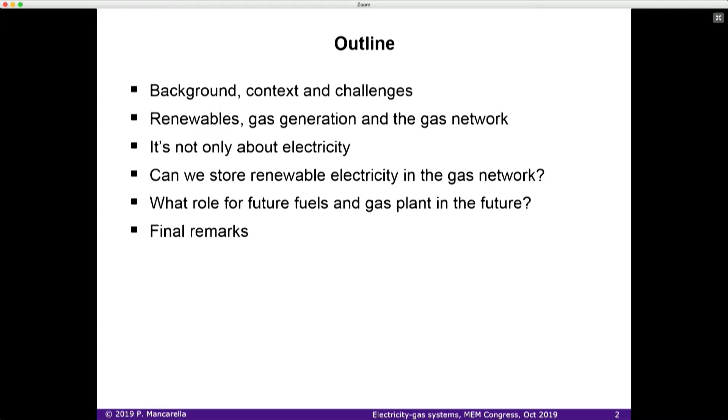The general context of this work is related to the so-called energy trilemma. So the requirements to deliver energy that is sustainable, so low carbon, in other words, is secure, and of course it's affordable, inexpensive. Of course, it's not easy to meet these three aspects of the trilemma altogether. That's why it's called a trilemma.

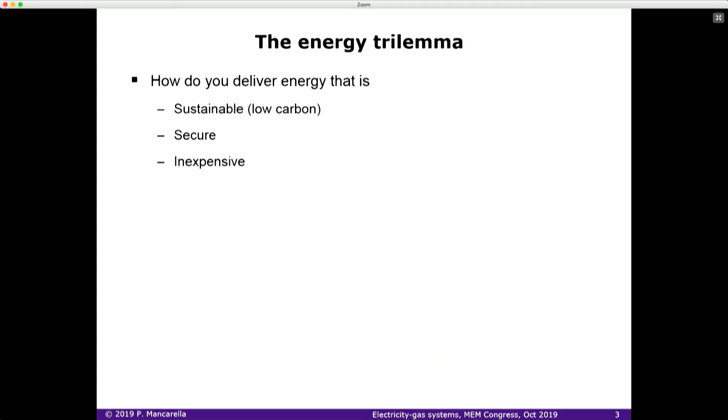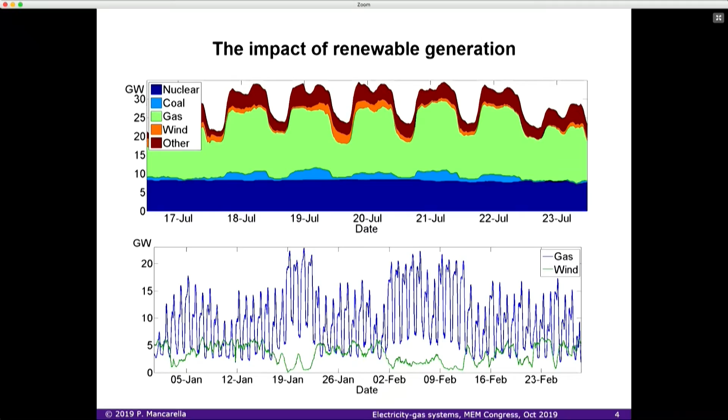Now, this is a situation that is common in many countries, where in practice, gas generation, particularly combined cycle gas turbines, and in some cases also open cycle gas turbines, are used to balance the variability and the uncertainty of wind and, where it's the case, also solar energy.

What are the challenges when we talk about that? Well, there are some challenges related to the technical aspects and the economic aspects of operating such an integrated system with renewables and conventional gas generators. In this slide, what I plotted is, for different penetration levels of wind capacity in the United Kingdom system, the level of displacement that wind brings onto conventional gas generators in terms of both capacity and energy.

To be more specific, if you look at the level where it says 30,000 megawatts wind, you can see the orange column indicating 23%. That means that 30 gigawatts of wind is effectively displacing 23% of energy produced by gas generators. You also see a smaller column, sort of reddish brown color, again for 30,000 megawatts of wind, indicating 6.4%. That refers to capacity displacement.

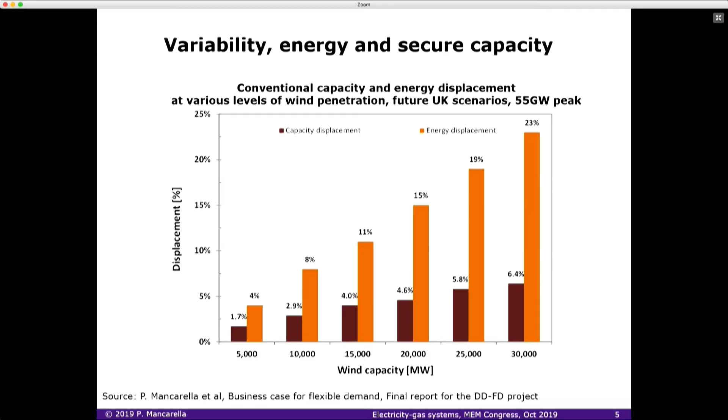And this effectively means that if wind is not there to cover the peak demand, because there may be no wind blowing when it's needed, you still need conventional gas generators to supply the peak demand. Therefore, a relatively small amount of capacity is displaced. However, any time that wind or solar energy is available, because the marginal generation cost of renewable energy is close to zero, it would displace energy that otherwise would be produced by conventional gas generators.

If you look at this more specifically in terms of utilization level of these generators, what I plot here is the utilization level for the entire generation fleet in the UK. It is not a real number, but it's realistic numbers. It's based on a model that is basically reflecting the real UK system. And you can appreciate the utilization level for different generation units that constitute the UK generation fleet.

As you can see, in brown we indicate the utilization level of conventional power plants when there is no wind and no renewables in the system. Whereas in orange, we see the utilization level in the presence of 30 gigawatts of wind, which is almost the current amount that we have in the system. Clearly, the utilization level of the generators goes down substantially. On average, it goes down from about 50% to less than 40%.

This is particularly severe for the so-called peakers. These are basically the last 50 generators in the UK fleet, which are also the smaller and more flexible generators used to cover the peaks and to balance the system. As you can see, their utilization level goes down dramatically, and for many of them moves from 30-20% to less than 10%. There are quite a number of generators affected, and these are primarily gas generators.

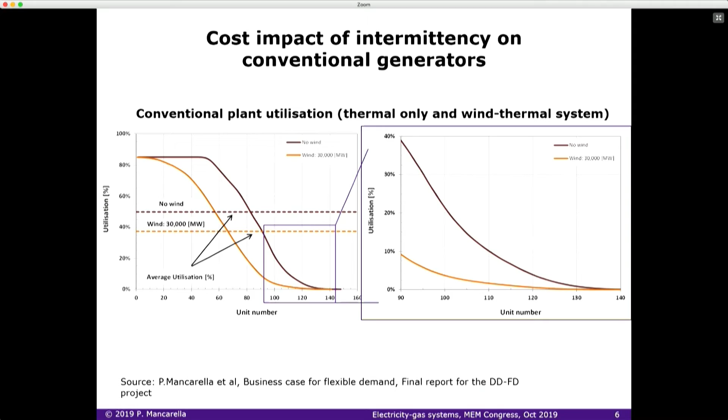Why is this important? If you plot the cost of production from a conventional generator, for example a gas generator, against its average utilization level, you see some form of hyperbolic function. Of course, you would like a very high capacity factor so that the average cost of production goes down, because it also incorporates investment cost. The higher the capacity factor, the lower your average cost, because you recover your investment cost over a large amount of energy. I'm sure many in the audience will be familiar with these concepts.

If you take the current average today, about 50% corresponds to a certain level of average cost of production for thermal generation plants. Imagine that this is primarily gas, because coal is not really part of the system now. If you introduce more and more renewables, because the utilization level goes down on average, the cost will go up a little bit.

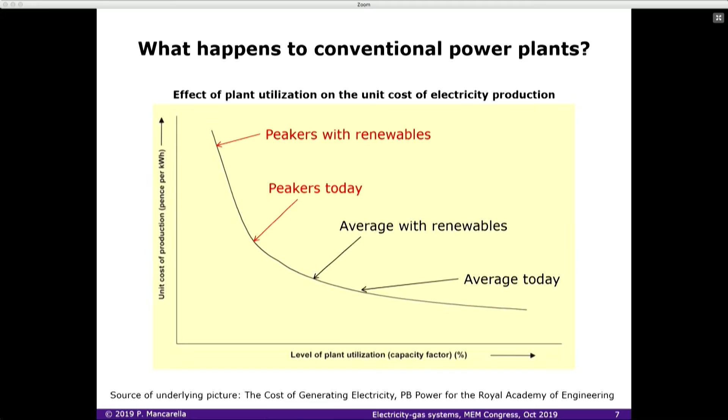But what does this mean for the system? If you look at the role of gas power plants today, they are the flexible generation units providing flexibility as well as security and reliability. What happens if these units go bankrupt and get pushed out of the system by renewables, which in many cases are there because they are supported by energy policy schemes rather than being fully competitive in the market? What happens is very intuitive, and unfortunately, it has already happened.

Conventional generators, gas generators were pushed out of the market by renewables. Therefore, the moment that there was an event, a problematic event, and you needed security support from conventional generators, it was not possible. And there was a system-wide blackout in South Australia.

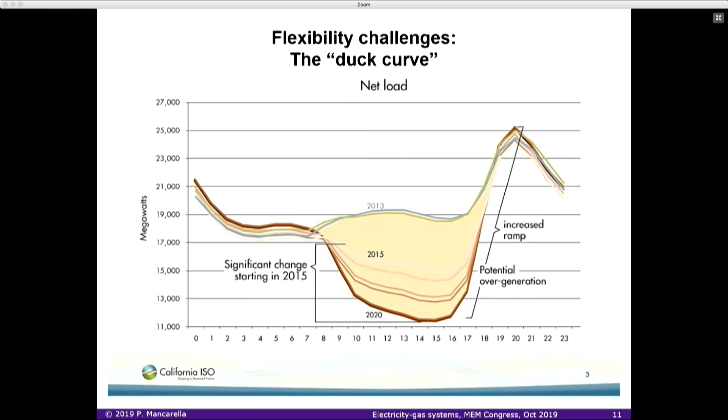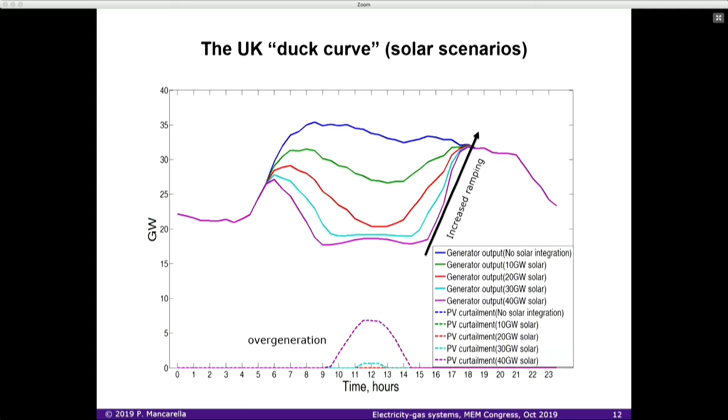Very similar issues, you would say, in UK models for the future, where effectively with more and more solar here in the UK, which is not a very sunny country, as you would know, there may be substantial ramping issues, and the behavior of the combined cycle gas turbines in future scenarios changes significantly, and also in very non-linear ways. For example, the utilization level first goes down and then goes up because of the requirements for reserves, if you use conventional generators, gas generators, to provide the reserve services. And these reserve services will be more and more needed in larger quantities in the future to deal with variability and uncertainty in wind and solar.

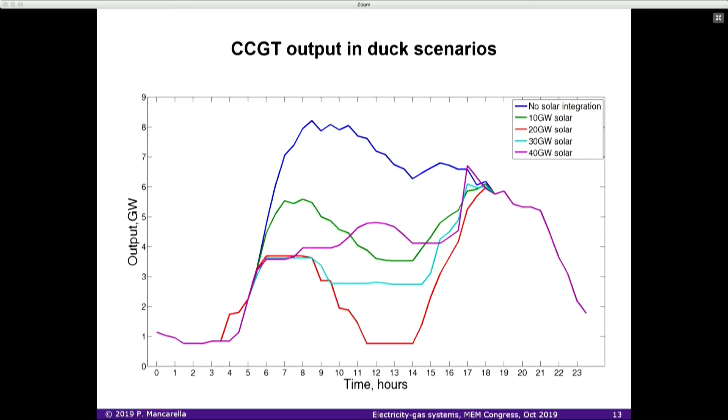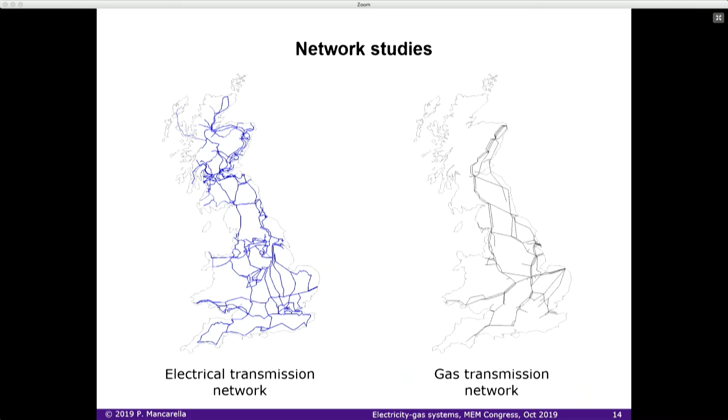And to address this a little bit better, actually, we started developing more consistently integrated system models for the UK national grid that look at integrated analysis of the electricity and gas transmission networks. So these are the real networks, and this is the model that we developed some time ago for the UK national grid, that was particularly worried about a number of issues that might come with flexibility.

As many of you would know, when you operate the gas system during the day, you would do this by using the line pack flexibility that is available in the gas pipelines, especially the amount of storage that is available in the gas pipelines that serves as a buffer for energy that is needed to be pushed into gas generators, for example, or to supply the heat demand, like in the case of the UK, where the heat demand is very substantial.

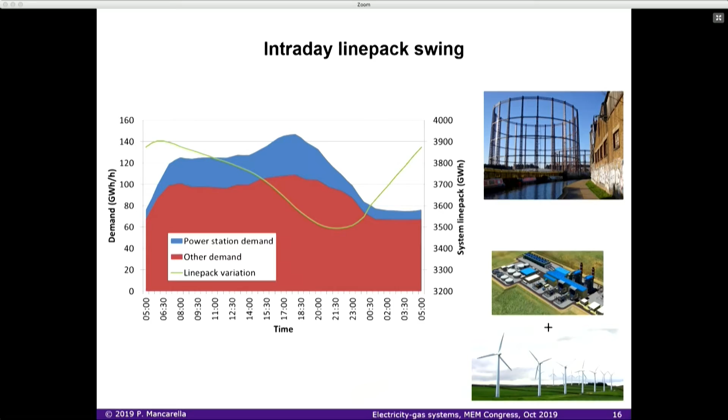And normally you would refill the line pack during the night, and then you would use this line pack. So you would use the storage available in the gas network during the day until reaching a minimum immediately after the peak, and then again you would start replenishing, filling up again this storage that you have available in the gas network.

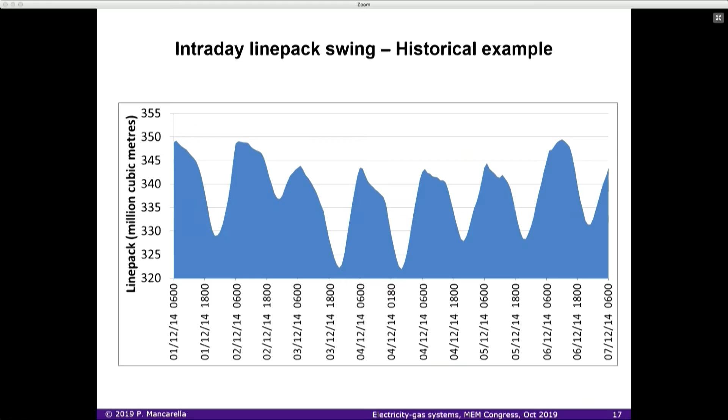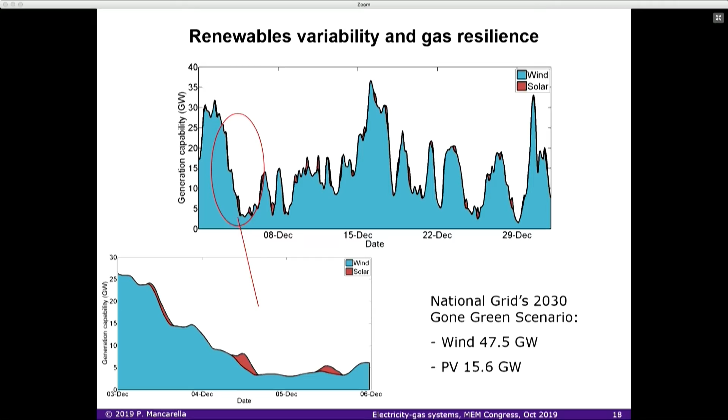Now, if I imagine this kind of situation in the future when there is lots of renewables, as I said, there would be lots of variability brought by these renewables. And again, we put ourselves in a future scenario with, in the UK system, lots of wind and lots of solar. As you can appreciate, you may have some days where over 1 or 2 days, wind can change from about 25 gigawatts to about 5 gigawatts. So we have a huge variation in wind output across 1 day or 2 days.

The problem is not only the fact that you have this huge variability, as you can better appreciate here. The problem is also your ability to predict this variability of wind, so the uncertainty of forecast in wind and similarly in solar, and therefore the ability of procuring resources that can balance the system.

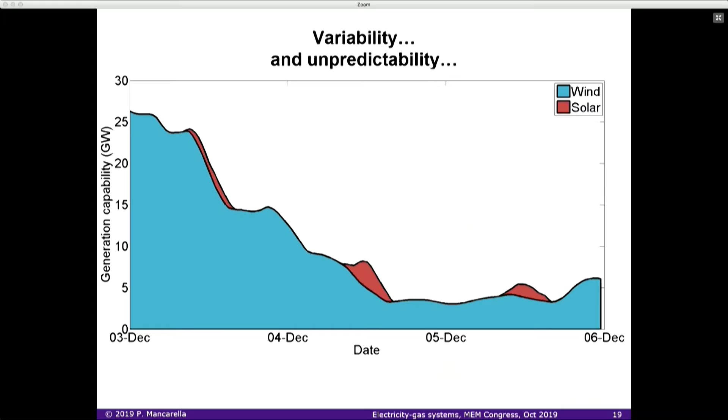And again, of course, I'm talking primarily about gas power plants, because effectively, when you manage the gas system, as again many of you would know much better than me, you would schedule your electricity system, of course, but also your gas system the day before. And then within the day, you would try to manage the unscheduled requirements for providing gas to the system by managing, of course, the line pack flexibility, first of all, but also in case using storage terminals, LNG terminals, and all that. But primarily, you would like to use the flexibility available in the gas network line pack.

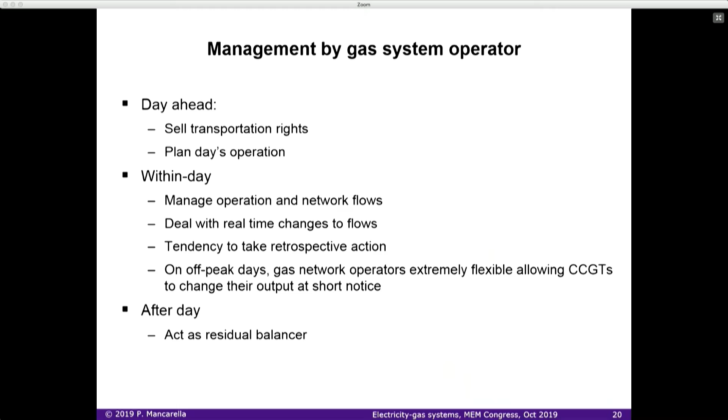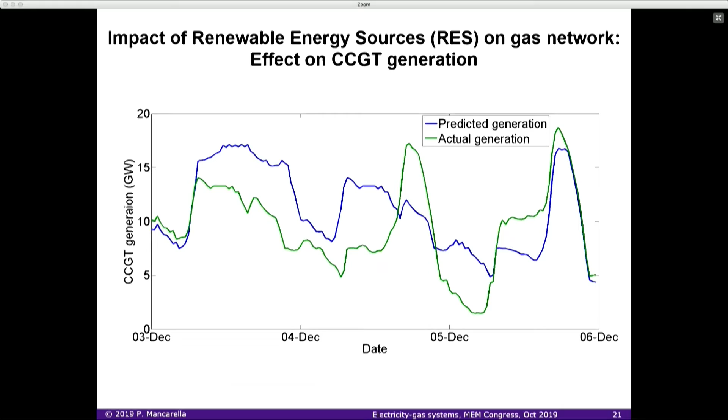When you have situations very extreme, lots of wind out, I said it's not just about the variability; it's also about the complexity in managing this variability, given the potential uncertainty of that. In this picture, I show what the predicted generation was for combined cycles under similar conditions I was showing earlier, in blue, and what the actual generation was in green. Obviously, the blue is coming from some form of day ahead generation schedule, whereas the green is coming from some form of real-time dispatch to balance the actual wind that was available at the time.

So the problem is, because I have all these renewable energy sources that are highly variable but also partly unpredictable, if I rely more and more on gas power plants to balance that massive amount of variability, I may actually have trouble with the physical management of the gas network and particularly of the line pack.

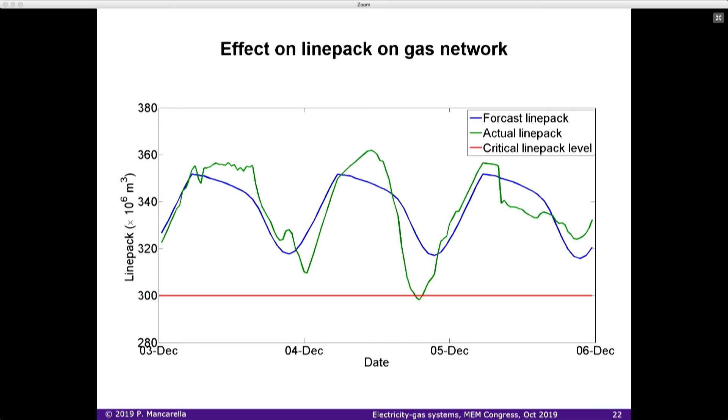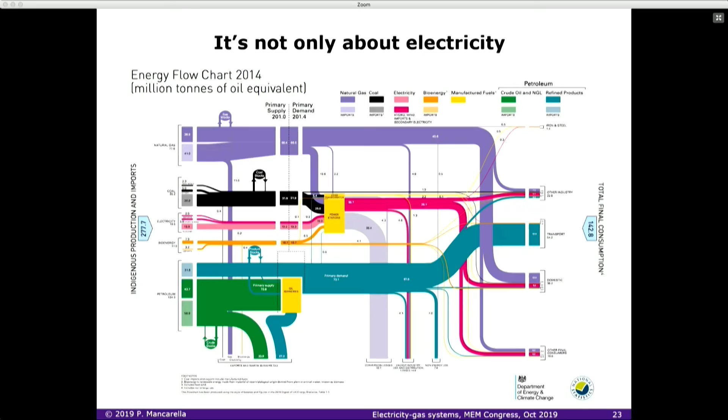However, the studies that we were carrying out for National Grid brought into the picture a further assessment, primarily the need for understanding how heat was interacting with electricity and, of course, gas, under future scenarios of electrification or use of other technologies. And this really goes into the question of how we optimally integrate all energy sectors and try to make use of renewables that in many cases could actually have to be curtailed.

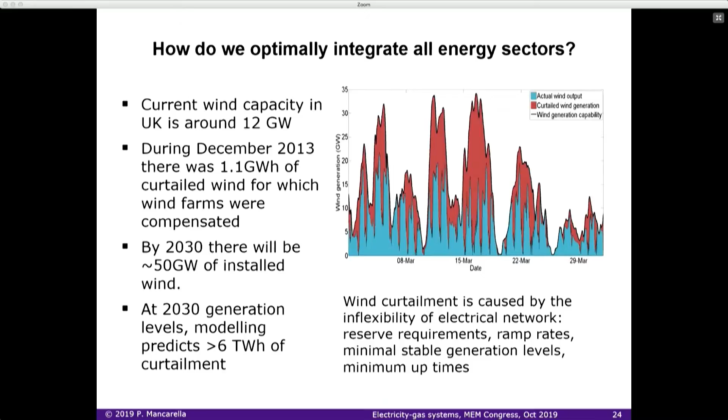Now, as an output of our studies, what we developed for National Grid was an assessment of how, under future heating scenarios, you integrate the electricity and the gas systems to deal with balancing the electricity system that is now dominated by renewables, but also providing heating demand in different ways, for example, by gas boilers, electric heat pumps, combined heat and power plants, and so on. The challenges for the gas network to deliver this actually were even higher than for just renewables.

And in fact, what we found for the UK system is that at times we needed to limit the output of the gas power plants that were supposed to provide renewables flexibility, because otherwise we would not have sufficient flexibility in the gas network to provide sufficient gas to the power plants. In other words, if you only consider the electricity system without coupling the electricity system and gas system, and of course the two markets, you would think that you are okay in terms of balancing the electricity system by gas power plants. However, when you also included gas system operation, the gas system basically could not make it.

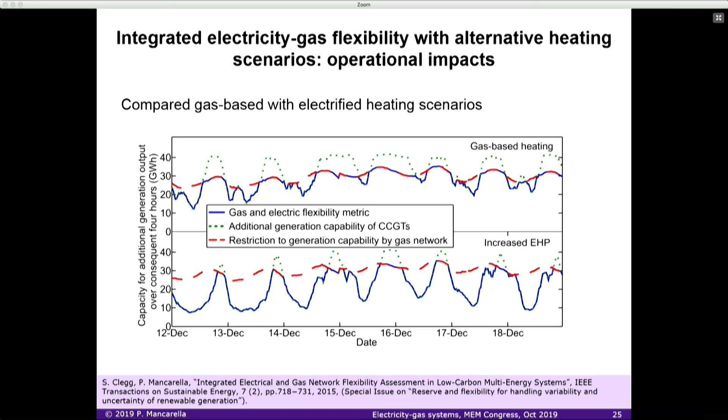So what we did for National Grid was actually to develop a tool that would integrate the gas network flexibility constraints into the ramp constraints and reserve constraints of the electricity system, so that, from a technical perspective, the two systems could become more integrated. Of course, we're still looking at future scenarios, but these are not very far. And in order to deliver on this technical system in its full capacity, it would also require market changes and integration of electricity and gas markets. I will skip this slide, which basically says the same thing as I said in terms of extreme ramps that you have on the gas system.

Now, what other options do we have actually to address this system between renewables, the electricity system, the gas system, and so on? Can we use the gas network as a storage means for electricity renewables? This is because, of course, we talk a lot about electricity storage, but batteries are relatively expensive, and batteries are good to store small amounts of energy, not large amounts of energy. Pumped hydro systems are not always available, also for geographical reasons, in many countries. Therefore, there is a need to look for other forms of storage. Could we use electricity from renewables to produce gas, basically hydrogen, and then inject this hydrogen into the gas network and use the gas network as a form of storage?

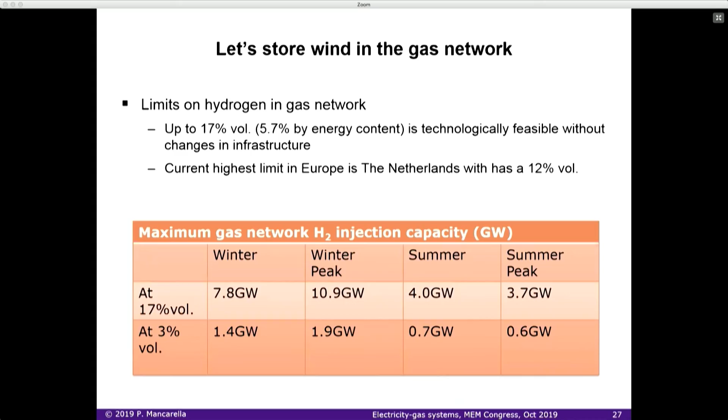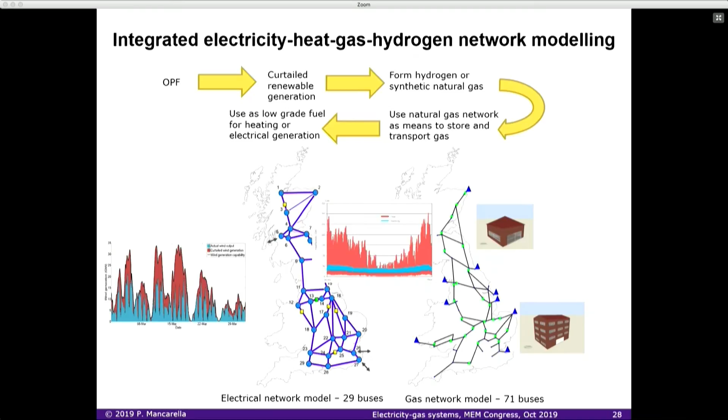So what we did was to add hydrogen into the picture and develop a full integrated model of electricity, heat, gas, and hydrogen system for the whole UK that could provide some ideas about future scenarios to the UK National Grid. And it is in this context that we developed the first models about power to gas.

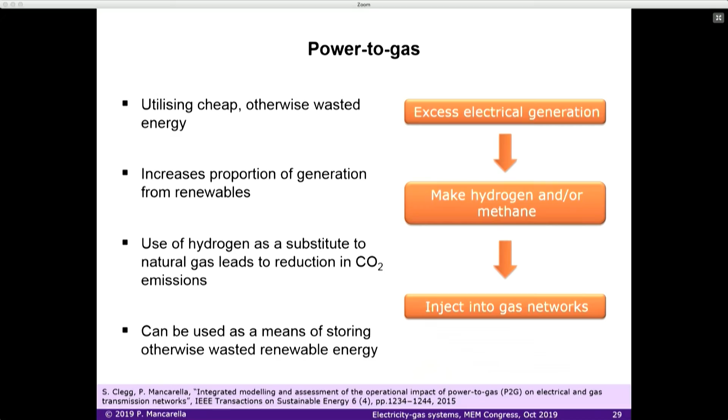So this idea of taking renewable electricity that is cheap, or that would even have to be curtailed because there's too much electricity with respect to demand, turn it into hydrogen via electrolysis, in case produce methane by putting together hydrogen and CO2 in the so-called Sabatier reaction, and then inject into the gas network either hydrogen in certain volumes according to the limitation that will have to be established, or directly methane after having methanized hydrogen and CO2.

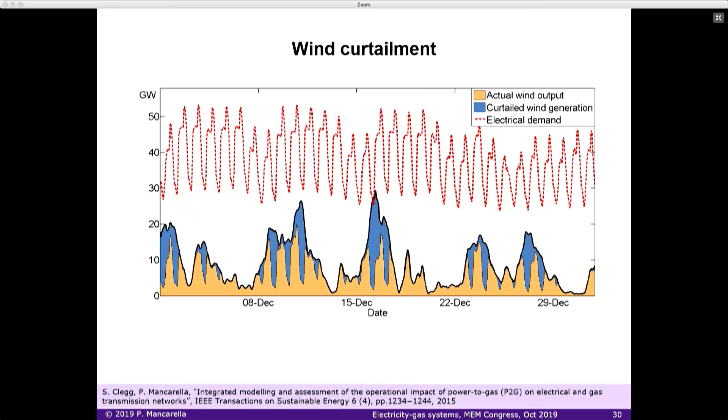Now, when you do that, what will happen is that all the curtailed wind generation, in case solar generation, that you will have in future scenarios with lots of renewables in the system, now could be used actually to decarbonize the gas sector, because this is effectively what we are discussing. It's like taking clean electricity coming from solar and wind and producing hydrogen that can be injected into the gas network so as to decarbonize the gas network.

And a few years ago, we performed this analysis by indicating how much hydrogen, or in case synthetic natural gas, you could inject into the gas network, and the cost benefits and emission benefits that you could have in doing this. So on the one hand, you bypass electricity constraints, and on the other hand, you bring economic benefits and environmental benefits, because you basically use otherwise curtailed wind to decarbonize the gas sector.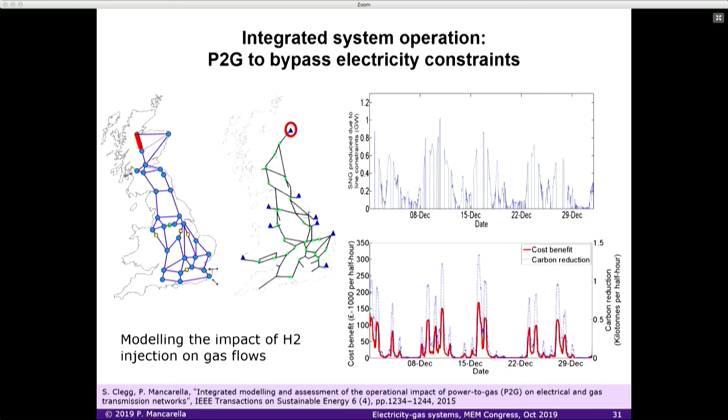Similar use cases can be done to increase the pressure in areas where pressure levels can be particularly low. So you would inject hydrogen or synthetic natural gas to raise local pressure in some areas of the system.

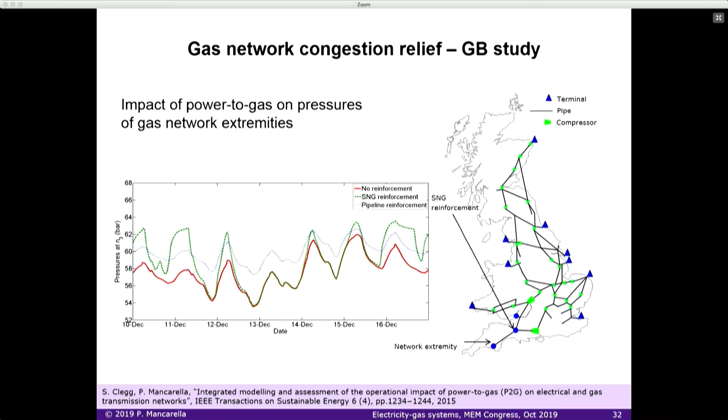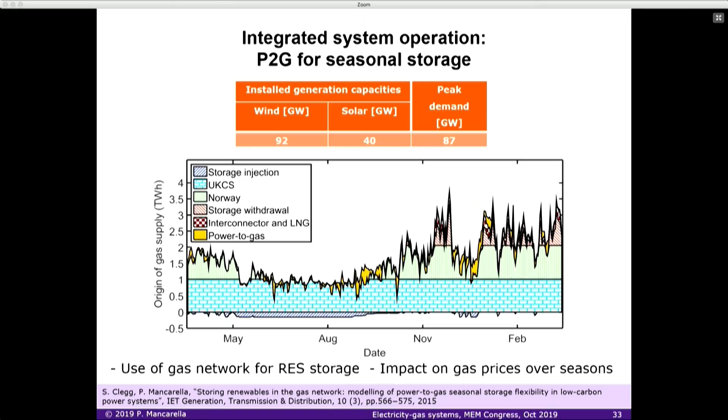Or, of course, you could use this power to gas for seasonal storage. So particularly by storing low carbon electricity during summer, when there's lots of wind and solar and not as much demand, including for heating, then put it into the gas network, store it in the gas network, and then use this clean gas during winter when there is a higher heating demand and also requirements for electricity in general.

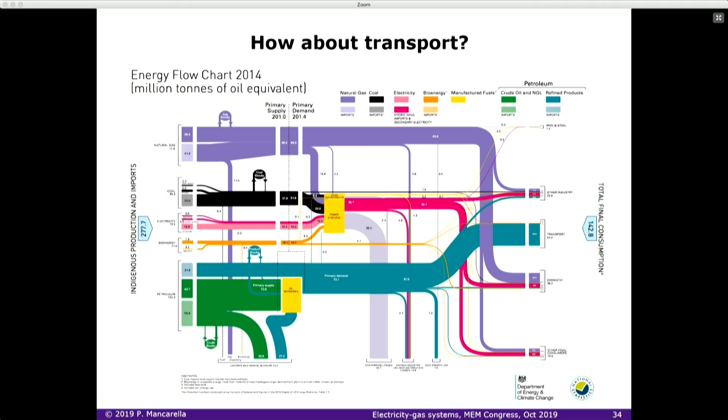Of course, I'm not forgetting transport. Transport is still there, and in fact, you can talk about hydrogen vehicles that are particularly suitable for long distances and very heavy transport, like trucks and trains, and to some extent also ships. And again, this is so-called power to hydrogen to X, where power to gas is actually used to supply hydrogen vehicles, and buses and trucks are ideal cases, because in those cases batteries are too big, too heavy, too expensive. Therefore, hydrogen can be a very suitable energy vector.

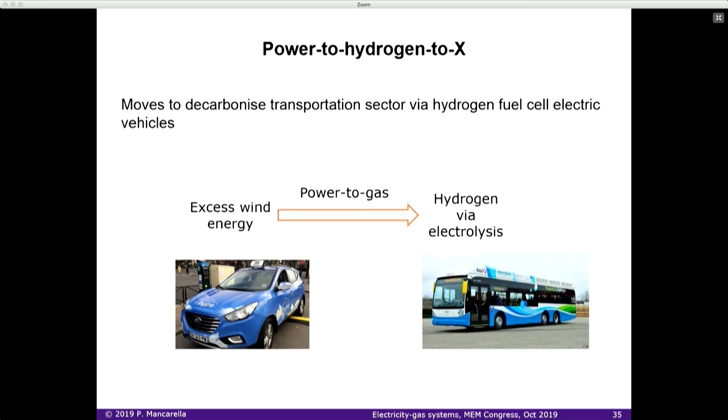But you would say, okay, but how about Australia? This is primarily coming from my past work at the University of Manchester. How about Australia? Where actually we are carrying out a number of exciting experiments, I would say. For example, looking at integration of electricity and hydrogen into virtual power plants.

For example, in an area called Port Lincoln in South Australia, where you have a number of wind farms that produce lots of wind, but unfortunately, they cannot export to the rest of the system because, again, of heavy congestion. And at the same time, there are more and more requirements for connections for solar and wind farms. And again, for the same reason, they cannot export solar energy to the rest of the system because of transmission congestion.

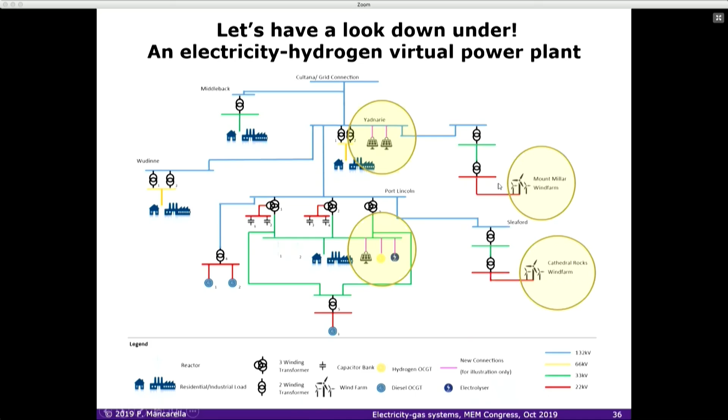So one idea was, why don't we take all this available wind and solar that otherwise would have to be curtailed, and we produce hydrogen through electrolysis, and we use this hydrogen to, for example, power local hydrogen vehicles, to power local gas turbines that can operate with a mix of gas and hydrogen, and in case to export hydrogen to other areas where there is a requirement for hydrogen.

This so-called... Is there any problem? Sorry, just...

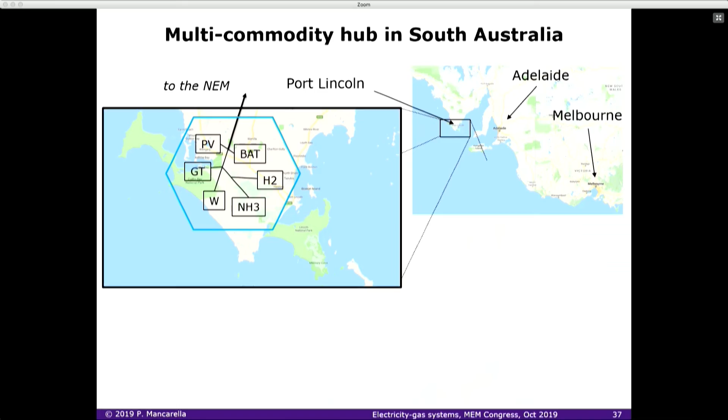Okay. Keep going. So there is a so-called multi-commodity hub, where effectively you have a mix of electricity and fuel imports, and then you generate a number of energy outputs that are renewable electricity, hydrogen. You supply hydrogen vehicles. You provide a number of operational services to the system that I can't detail now because of lack of time. And in case you can also export hydrogen.

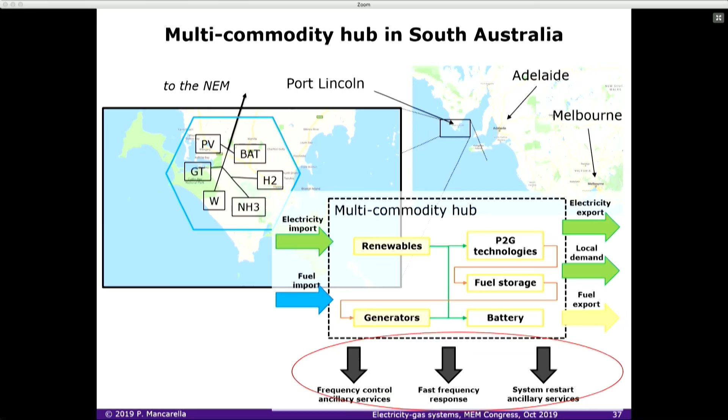And in fact, in the picture, the idea is to have more renewable energy sources, and produce hydrogen that could be exported to other countries. For example, it could be exported to Korea, to Japan, by maintaining the same business case that they have now. What I show here is the Sankey diagram of Australia, where again there are lots of available fuel sources, particularly coal and gas, and even uranium.

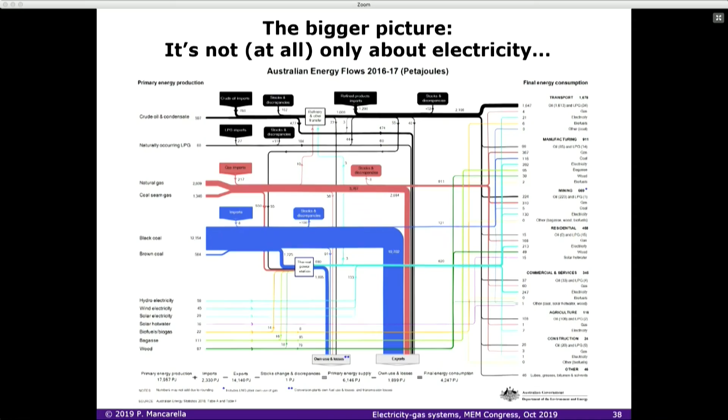And much of these resources are actually exported. They're not used locally, they are exported. So Australia would like to do something like, instead of keeping exporting fossil fuels, can we now start exporting clean fuels, basically hydrogen, or ammonia, that is a little bit easier to transport than hydrogen. So to become a sort of superpower as it is now, but of clean energy, not of fossil fuels.

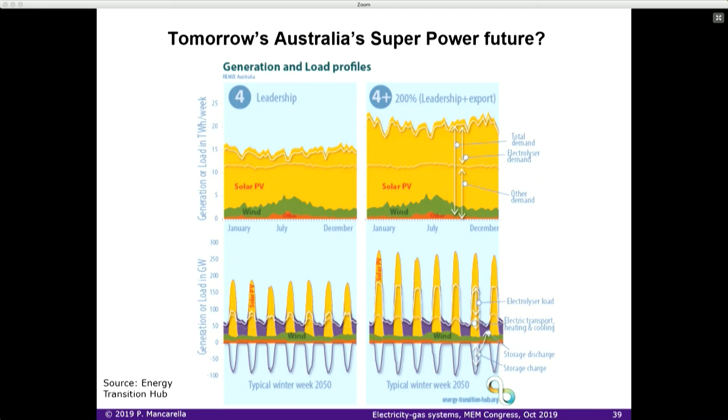And these are some of the scenarios that have been considered, at a massive penetration level of renewables and huge amounts of electrolyzers in the order of 100 gigawatt, 150 gigawatt of electrolyzer to produce hydrogen, to be able to export at scale huge amounts of solar energy and wind energy. We are now analyzing the technical feasibility and the cost feasibility of all these scenarios.

Eventually, we see everything coming together. For example, in some sort of futuristic ideas, we will have combined cycle gas turbines equipped with carbon capture and storage to capture, of course, CO2. And then some or all of this CO2 would be captured and used with the clean hydrogen coming from power to gas to create methane in the Sabatier reaction. And then this methane will be recirculated into the system and used for balancing purposes.

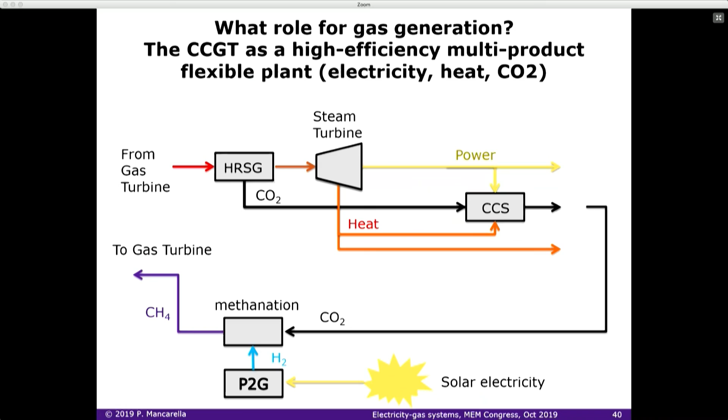So with this kind of mechanism, you would basically optimize the use of both electrolyzers and renewable energy sources, as well as the current or future gas system and gas power plants that will be used for balancing. So we're really looking to understand the feasibility of these future scenarios, and in particular, we have one important project. It's called Future Fuels CRC.

We are analyzing all these options at scale, combination of electricity, gas, and hydrogen systems, and assess various technical and economic scenarios. This is a very large project. The whole Australian gas industry is basically involved. It's about a 100 million project, just to give you an idea of the order of magnitude. It's basically a research project of 100 million.

Very relevant is also the project we have with UK National Grid, where we are currently reviewing their planning methodology, particularly to deal with large-scale uncertainty in planning. At the moment, we're doing this for the electricity system, but we plan to extend this also to the gas system, because the big question will be, how do I plan an integrated electricity and gas system, given the huge uncertainties, particularly in the gas sector and with all this new technology coming into the systems. And of course, I look forward to collaborations with everyone interested in similar topics.

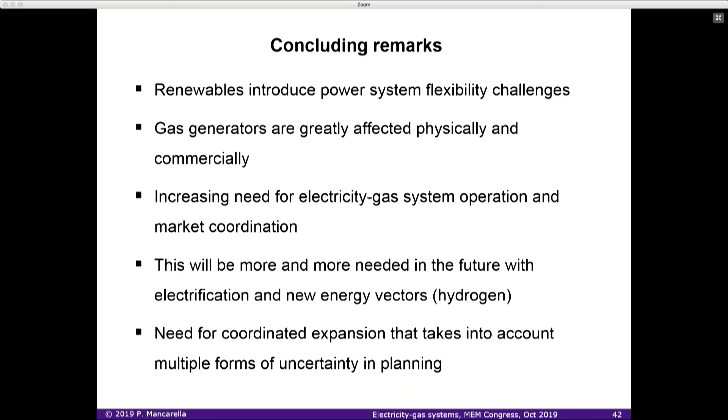Finally, all of this needs to be planned, and to do proper planning, we will need a tool that is currently not available, because it would need to take into account uncertainty in a proper way, and we're looking for stochastic optimization tools, so tools that take into account these uncertainties in different ways, so that we can plan the integrated system in a robust way. And here there are some references, but I'll skip that.